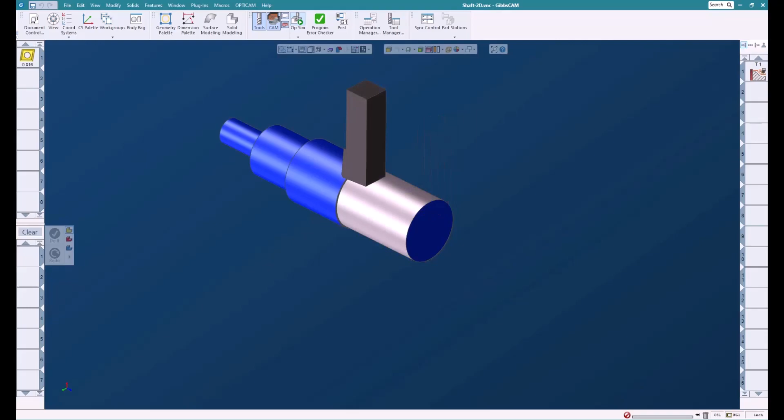In this Tech Tip, we're going to talk about how we're going to take this turned part and move it into a mill that has an A-axis so that we can do all the rotary machining that we need to do on the shaft. Let's get started.

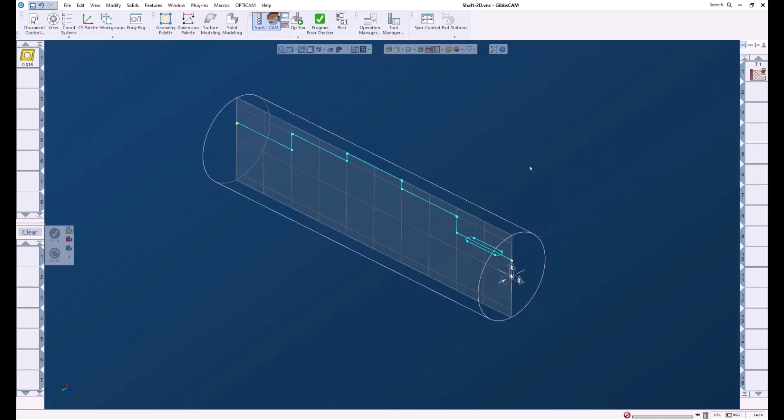Okay, so here's our lathe part. Let's go in here and sim this so we can see it. We'll bring it up, go through here, and there's our shaft.

Now what I'm going to do is go up and right mouse click, and create a facet body. This is going to be used for stock for our mill, so we can see the stock.

At this point, I would save this. So we could either do a Control S, which saves it, or we can go up here, File, Save As, and give it any name you like. So we could do one or two things.

Now that we've saved it, we need to get rid of all the lathe bits that we don't need, like the tool paths and the tools. So let's do that. We're going to throw the tool path away, and we'll throw the tool away.

And I'm going to go up and get rid of the work group that I used to generate the initial stock for this part. I just used a revolved geometry.

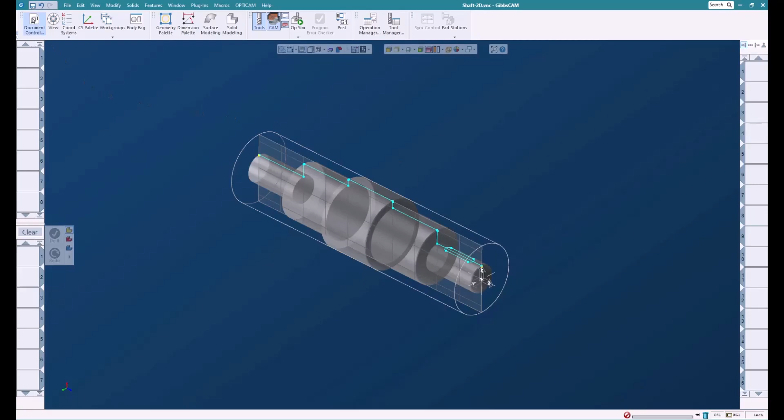Next thing I'll do is go up here to the document dialog, and I'm going to change to a machine that has an A-axis. And we'll set some of the parameters here for milling.

We don't need some of these offsets. They were left over from turning.

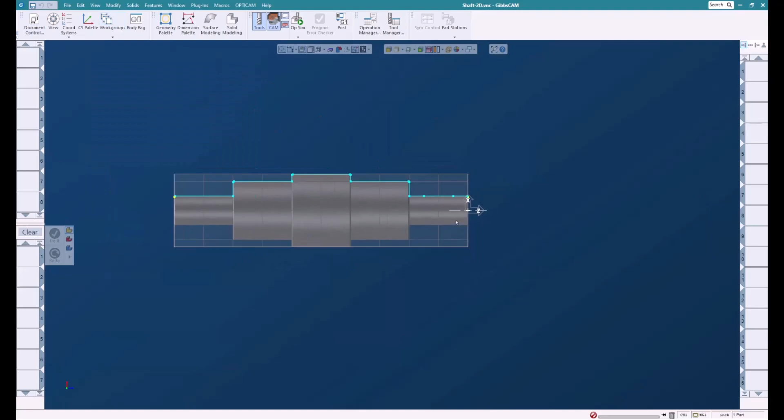And if we look at this now in an isometric view, you can see that it lays along the ZX plane. Now what we really need to do is get this onto the XY plane.

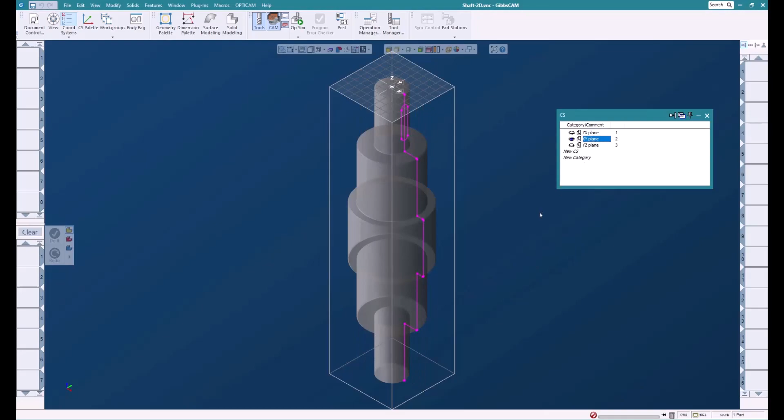So we're going to click on the XY plane here. And what we're going to do is select all the solid and the geometry, and go over here and do something called Change HVD.

Now what this does is it moves the geometry, the solids, onto the XY plane, and then it associates the solids and the geometry to the XY plane so that as we're machining in the XY plane, everything lines up and matches. That's kind of what it does. So we're just going to do that very quickly.

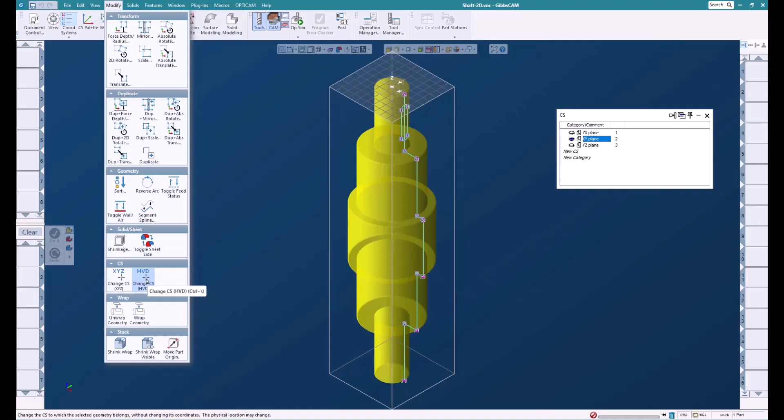We'll click it, and now it is moved to the XY plane. I'll do a shrink wrap here, and you can see that the part now lies along the A-axis.

The one thing I'd like to do is take this geometry, because it's laying on the wrong side of the part. I would like to bring the geometry up along the center line, which is really what we need for milling on this part.

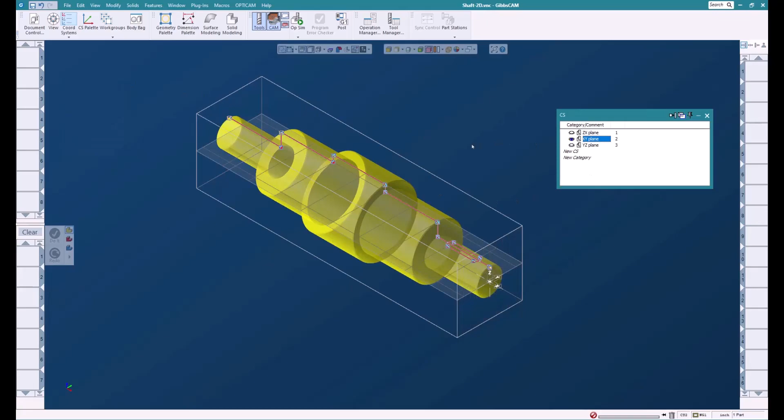So I'm going to switch to the YZ plane. We'll select solid and the geometry, and we're going to do a 2D rotate, and just rotate this up so that it's along the center line, and we'll switch back to the XY plane, and everything is good.

So now we're ready to machine our part. I'm going to switch on here, and turn this into stock, and we can put that away in the body bag for now, because we're just going to use this geometry here.

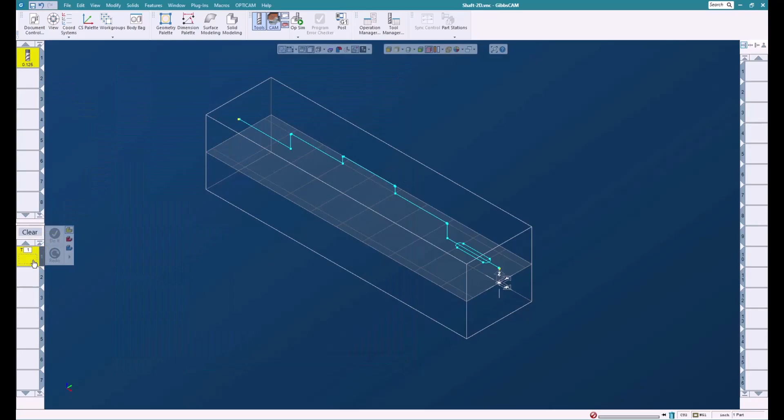So let's create a tool. 1/8 inch is good. We're going to bring this down. We're going to do a little bit of roughing. Here, we're going to go in and set a clearance.

We're going to set where we want to start, which will be right there. We're going to go down to 0.3. We'll give it 50 thou step down. That's good enough. Now we want this to be around 4 times.

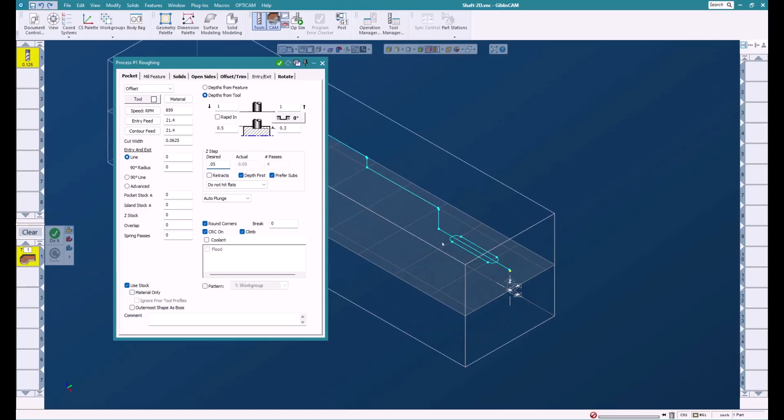So we're going to go to the rotate tab, and we're going to say, let's do 3 times at 90 degrees. We're going to do 3 times because we already have 1 here. This is the original, so we only need to say 3 times. We'll select the geometry, and we'll say, do it.

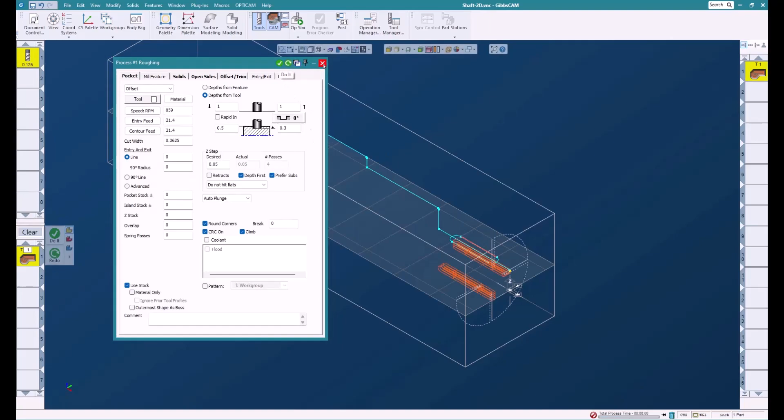And there you have our tool path on the mill. And if we op-sim this, you'll be able to see that we're now cutting the slots on all the sides.

So as you can see, in just a few clicks, we were able to take and put a lathe part onto a mill very easily and very quickly.